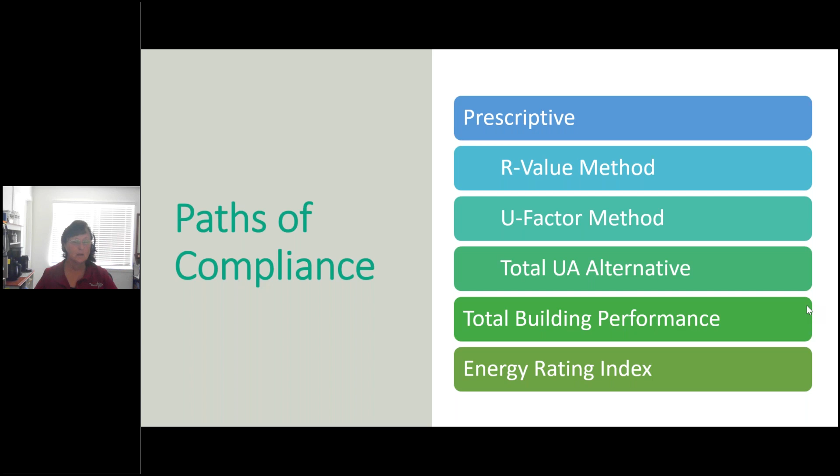So we're going to talk more in detail on those. What I want to give you right now is this high level. Here's what's coming in the 2021 that you really need to pay attention to. This is for residential, and it affects every climate zone out there. We'll look at some more of these in more detail like this. There's now options in that R value table. There are options for a cavity only option, a continuous only option, and a cavity plus continuous.

I don't see people doing some of those because the numbers get pretty high, but they are options, trying to stick with that intent that we have to provide flexibility and options. That's what this table now does. If you are used to the options maybe in climate zone 5, that I can remember right off the top of my head, R20 or 13 plus 5. Well, that's an R20 cavity or a 13 plus 5 for cavity plus continuous, and now you also have a continuous only option. So if you wanted to only do continuous insulation, which hasn't ever been in there.

So the U factors and the solar heat gain coefficients, I'll tell you, did go up a little bit in some of the climate zones. Now, if you're tuning in from Nevada today, Nevada has a few different climate zones. And so some of them did go up. And if you're in northern Nevada, you definitely want to pay attention to that U factor table, because there's a new footnote in there that once you get over 4,000 feet in elevation, your U factor drops.

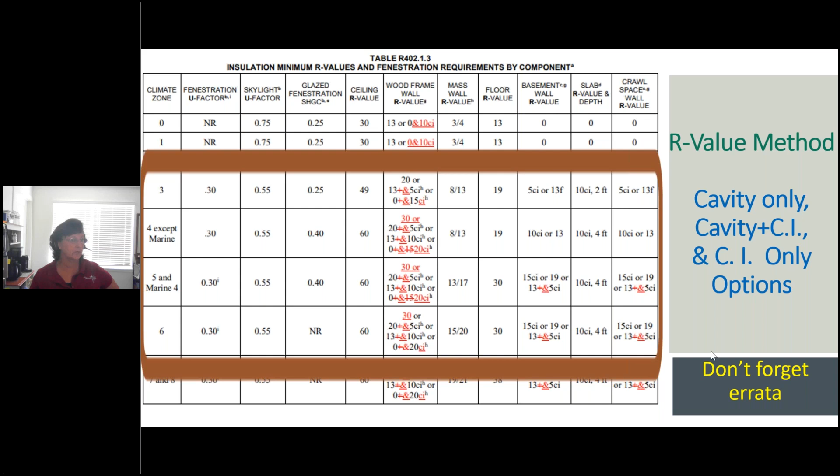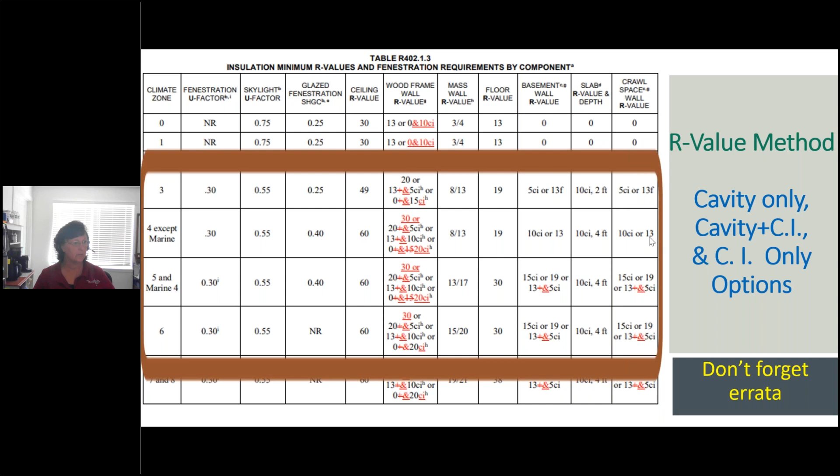But you'll notice some changes in here: the ceiling R values went up in almost every climate zone. The wall R values went up, so there are some changes to be had for sure. Then there's the U factor table, which is the U factor of every layer of the assembly. These two tables you can use simultaneously. So if I say, I'm okay doing all of this, I just don't like any of these options, I can do everything in this table and then go to this other table for the wood frame wall. So a 0.045 or a 0.060 or a 0.04. I just have to meet this U factor.

That means I have to add up all the layers of the assembly and still stay under this U factor. So you could do that and you might be able to comply. You could do that with every component and just calculate your own U factors and make sure you stay under them. It's allowed. It is a pathway. I just never see anybody use it because if you're going to do all these assemblies, you could just go over to the total UA path and use REScheck or one of the performance softwares that does a UA calculation, and it'll do it for you. But if you just wanted to do one or two of those, you could interchange the two tables. How do you find the U factor for material? ASHRAE Handbook of Fundamentals has it.

What I use is ASHRAE 90.1, because I have ASHRAE 90.1 that I use when I'm reviewing for commercial buildings. And in it, in Appendix A, there is a table for every different kind of assembly with insulation or without, and it gives the total assembly U-factor, so I can do that.

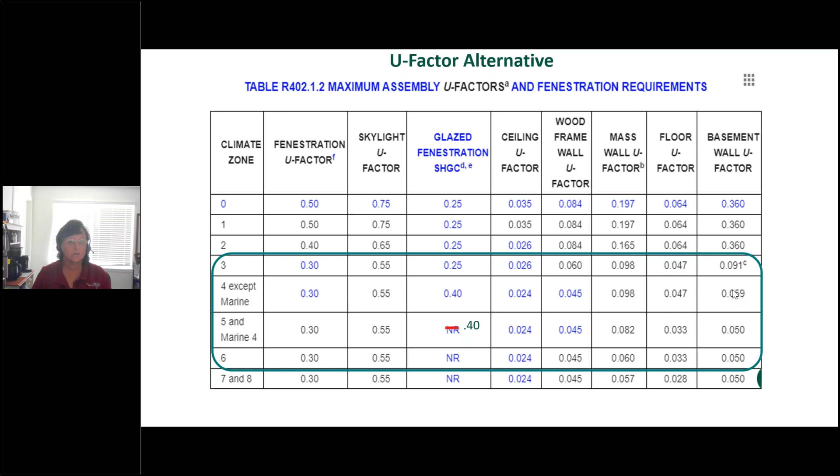Or sometimes, if I just have one thing I want to look up, I will go into REScheck and just put an assembly in there and get the U-factor for it without building the whole building in REScheck. So there's a few different ways to figure the U-factor, but if you're going to do it for the whole building, you might as well go over to this total UA path and use it.

What this is doing is like a twin house concept. You have two houses side by side, and you're trying to decide what the overall U-factor is. One house in the software, like REScheck or other softwares, is built to that prescriptive U-factor table. So based on how much window area and how much wall area you have, X amount of U-factor. It's a budget you have to stay under. So then you design it the way you want to, and as long as you stay equal to or under that budget, you're fine. You can build it that way.

And so it allows you to trade some things off, but only things that can be converted to a U-factor. So wood, insulation, glass, those kind of envelope items can be traded. You can't throw in a high efficient piece of equipment or a better duct leakage and trade that. You can only trade envelopes. So it is the first step towards a trade-off path, but it's only trading off the envelope.

I can put in a better insulation to get a worse window or vice versa, or I can put better insulation in my attic to get less insulation in my wall, or however you want to play with it to work it out. I call it my checkbook, the beginning of my checkbook.

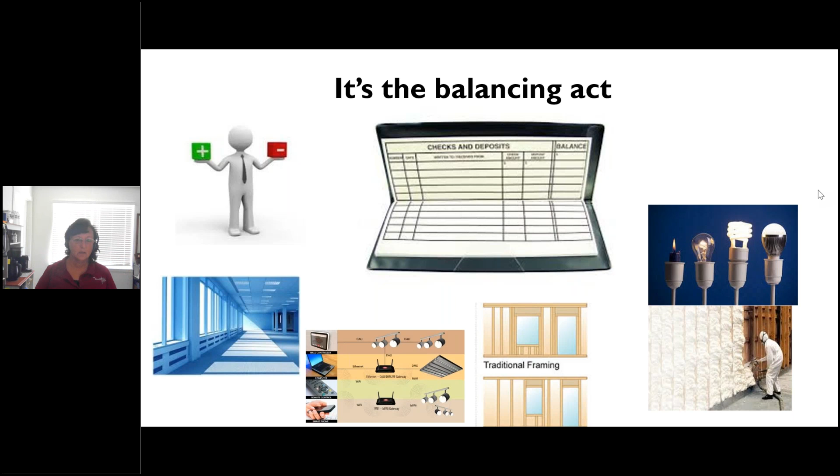And so the way this works is people think, okay, I have wood in my building and that's great structurally, I have to have this, and so if 1 king stud is really good, 2 king studs got to be better, right? And so what about this? Am I super great structurally with all of this wood in my building? Well, maybe. It might be a bit overkill, but what you definitely are is worse in the U-factor of your building. So what we're trying to get at is less wood.

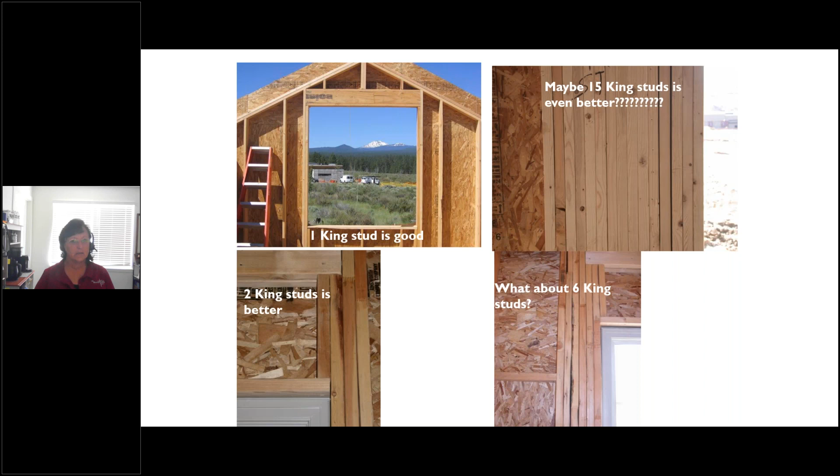And so if you see, wood has about R-1 per inch, whereas insulation is 3.5 to 7, depending on the type. So you could see without any continuous insulation, I can see all of the studs in this house. I can see that I'm going to get some thermal bridging. I'm going to get some loss there at all of those studs. So what this UA path and all of the other trade-off paths are trying to get us at is to cut down on some of that.

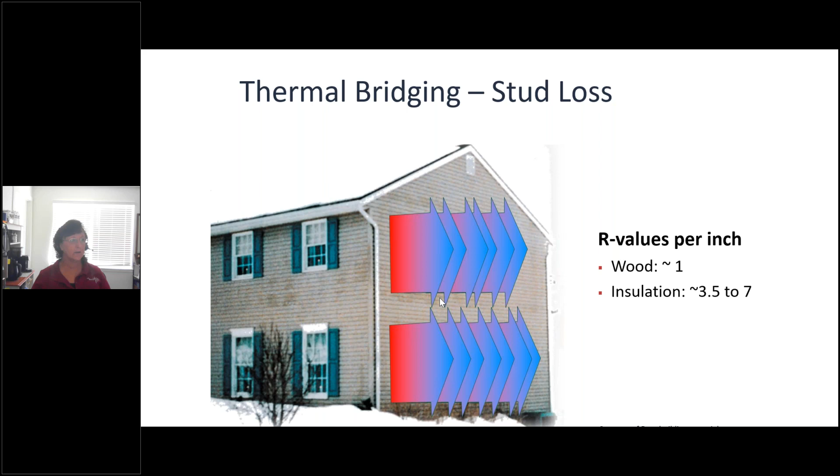And if I do, I can get out of something else, right? I'm not going to get out of it, but I can lessen the requirement. I probably will never find anything that I could totally do without. I won't be able to trade that far, but I could maybe put in less of a window if I put continuous insulation on this house or something.

So what we look at is if I have less wood, so maybe I'm doing some good framing, and I'm going to do 24 inches on center instead of 16 inches on center, then I have better framing. I have less wood, and wood is so expensive right now anyway, so there's one savings, right? I have less wood, so I have less thermal bridging, so there's energy savings, and then I have more insulation. Because I have more quantity of insulation, I probably could drop down on the R-value of the insulation and maybe be able to make that trade. So because I traded to less wood, I probably could trade down the R-value on my insulation.

So that's just kind of how this U factor and the performance paths work: what are you willing to do better than code? You might be able to do less than code somewhere else. It doesn't mean I'm not putting insulation. I just might be able to, instead of an R20, put in an R15, and still, because I'm using less wood, have just as good of a performing wall.

Or what if I'm willing to put in continuous insulation? So now I don't have any of that thermal bridging, right? I don't see any of those studs. If I put continuous insulation, that gives a huge credit in the code. And so now I can maybe put in lesser of a window, or I can maybe trade, well, in residential in the 2021, you can't trade slab edge insulation.

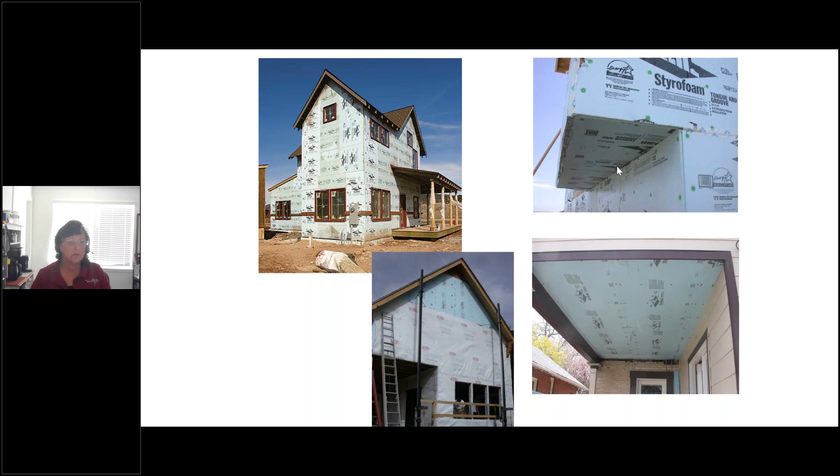This UA path, a lot of people are familiar with it. ResCheck is the simple software that we can use. Doesn't have to be ResCheck, that's just what people have associated with them. It's a free download at energycodes.gov. You just go in there and build your house, and tell it how you're going to do it.

Are you going to use a flat truss, or are you going to do a raised heel truss? A raised heel truss will give you a better credit, right? Because you're getting more insulation over the top of that wall. You're getting full height insulation. And so you would get a better U factor than with this flat ceiling or scissor truss. And then you have wood frame at 16 inches on center.

And then what if I did it at 24 inches on center? You could play around with it, but you can get more trades and maybe do worse somewhere. So that's ResCheck. There's a lot of things in there that are beneficial, but again, it's only the thermal envelope.

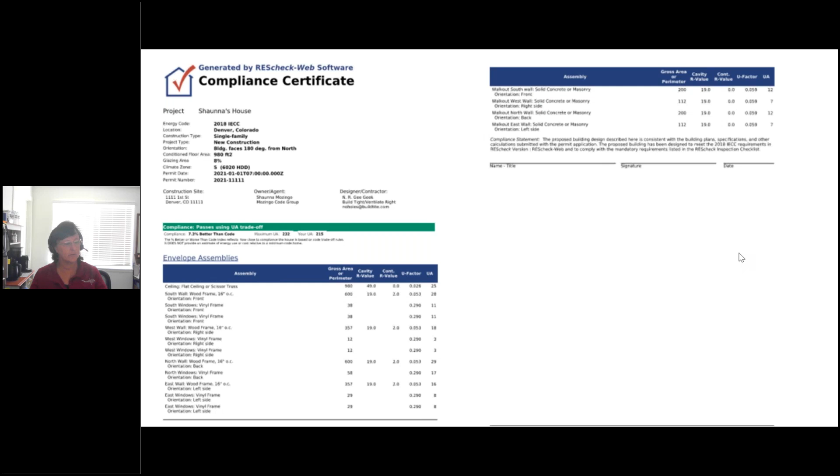If you want to trade more, I would challenge you to get an energy rater, a HERS rater, and go performance. This is where you're going to see the most of your trade and actually be able to see how well your building is performing. It's a computer software. Again, that twin house concept.

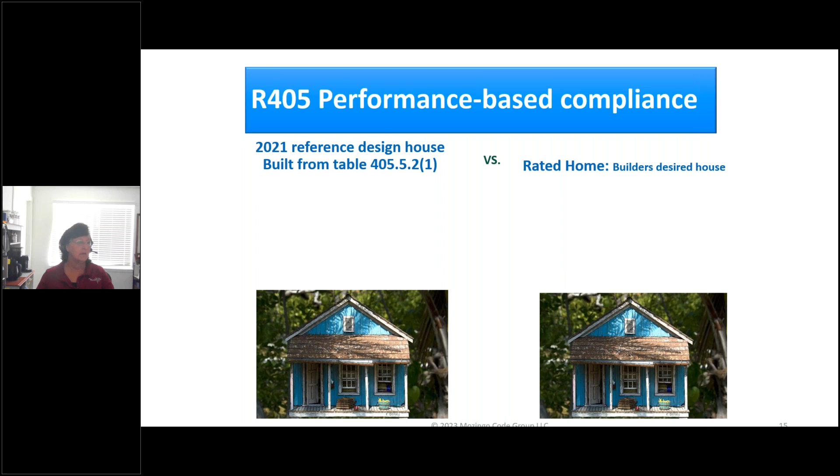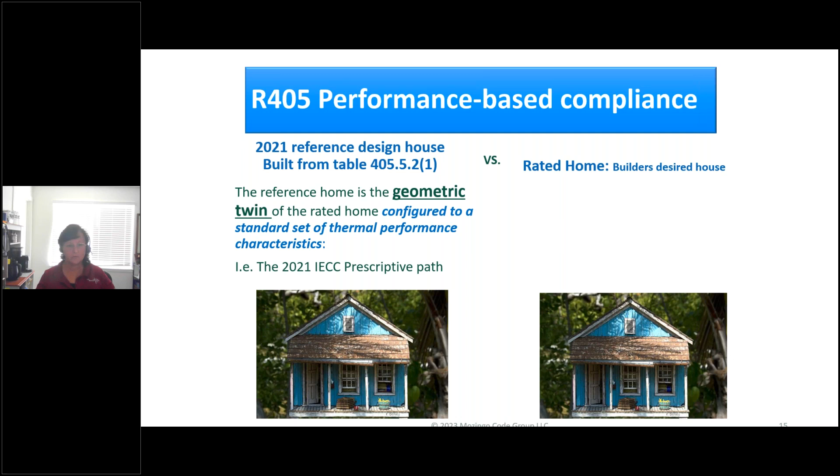It's got the houses that are designed with the same square footage and things, but one is configured to the 2021 prescriptive requirements, and the other one is whatever the designer or builder owner wants to build to, and you input them into the software, and it's based on cost of annual energy use. So as long as you could show that the house you're proposing to build costs less or equal to the house built prescriptively in annual energy use.

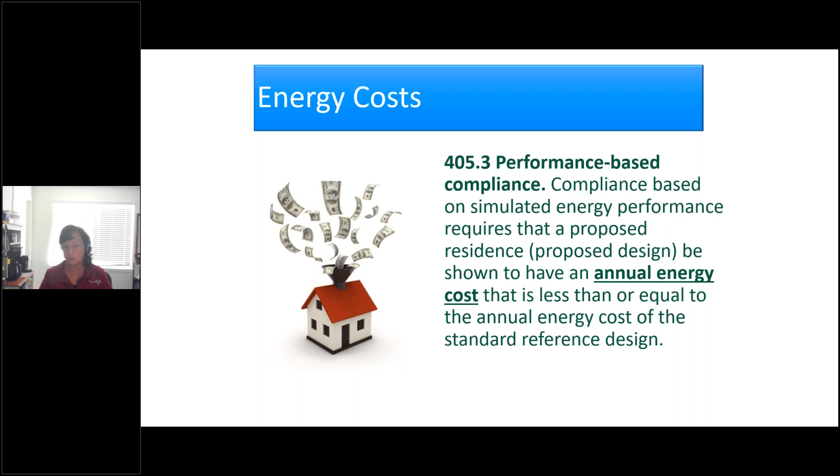So you input the local energy rates into the software, and as long as you can say over the course of a year, I'm going to be equal to or less than this house if it was built to code, you could do it the way you were proposing. So it offers a lot more trades. There's a couple softwares out there. Energy Gauge is used in Florida.

REM/Rate was the one for a very long time, but now Ekotrope seems to be pulling ahead as I do some research. But they both will look at the performance, they both will look at ERI, and they both will look at total UA. So you could use that software for all of those pathways. And you could see that the reports are similar. It's looking at heating, cooling, and water heating costs.

This is an old report, but you can see it evaluates many different code editions. And here's the cost if I built it prescriptively. The house that I'm proposing is only 945 instead of 1,008. I'm doing better, so then I can build it the way that I'm proposing. And that's from plans to proposed design, and then you go through and enter what you actually did in the field. It tells you how much better than code, and what edition you're doing it to.

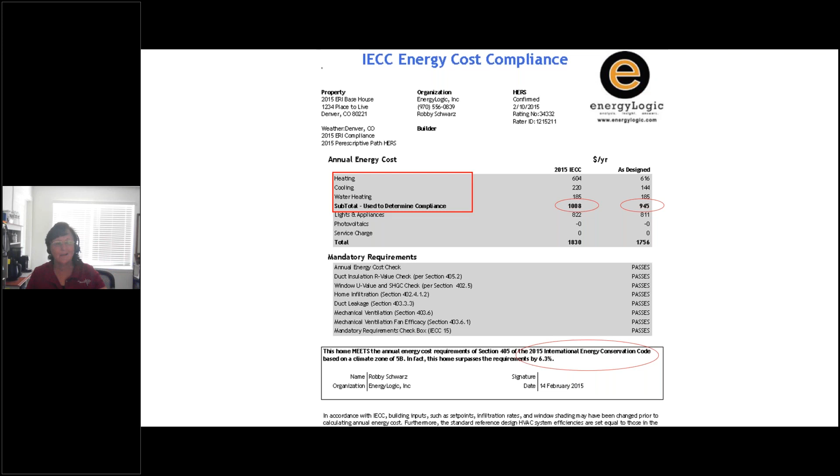So when I teach the actual paths of compliance as just one class, I will go through and explain it more, but we have got a lot to get through. So that's one path. And then the ERI path. The ERI path is the Energy Rating Index.

It's using a score for compliance. Same software, same people, same raters, everything. It's just instead of using that cost metric, or that cost metric also has an option for a BTU metric, this is using a score. A score of 0 would be a net zero energy use home. A score of 100 is the 2006 Energy Code, basically the 2004 supplement, but 2006 energy. So if I had a score of 85, I'm 15% better than the 2006, right? So I have to go through there and figure out what my score is.

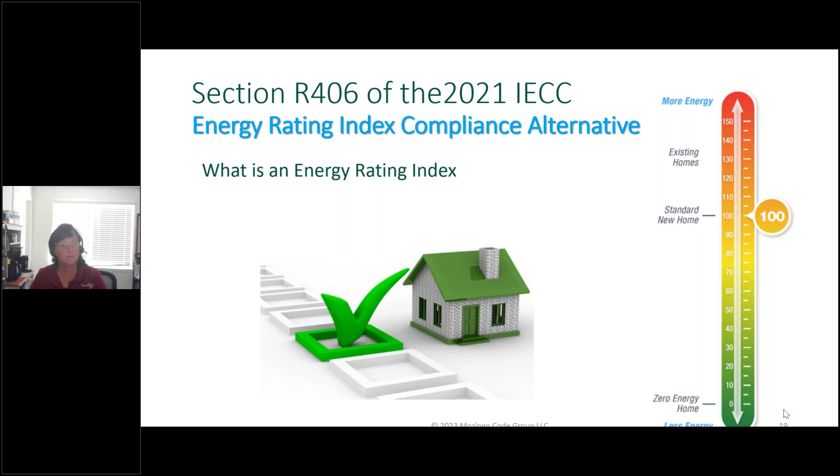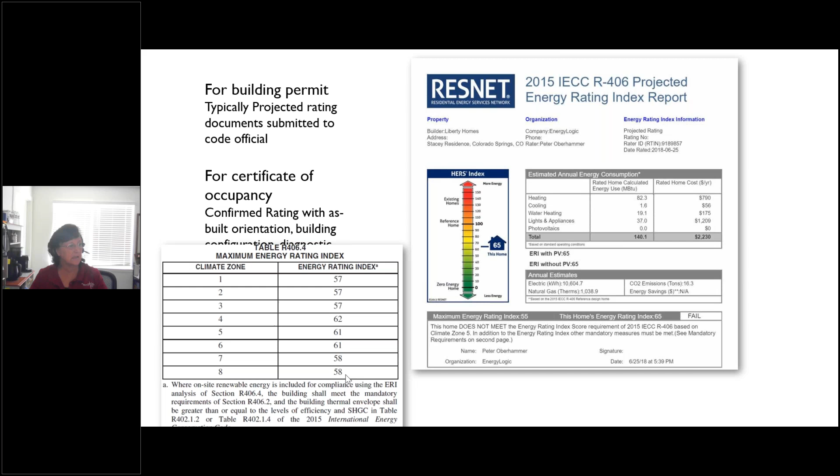You look at a lot of the same things. There's more trades built into this. You look at a lot of the same things, but over the years, it came in and it gave you a set of scores you had to meet. The 2021 has lowered those. So, if I'm in climate zone 5, I have to get a score of 55. If I'm in climate zone 3, a 52. I think we're at 6, maybe in parts of Reno or up there, 54. I have to get a certain score or better. So the lower the score, the better. Of course, we're trying to get to 0.

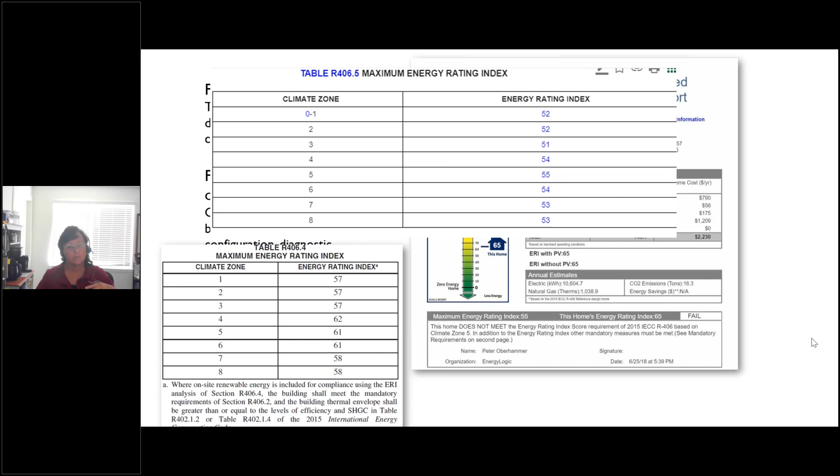I have to get a certain score, and it tells me what score I have to get, but it allows much more trade than any other path. And it does allow you to use solar and some other things to lower the score. So it allows you to say, maybe I'm going to put in a high efficiency furnace that will lower my score. That's my deposit into that checking account. Or high efficacy lighting is now required at 100%, so that trade might not mean as much. I could put all my ducts inside the envelope. That gives a really nice trade.

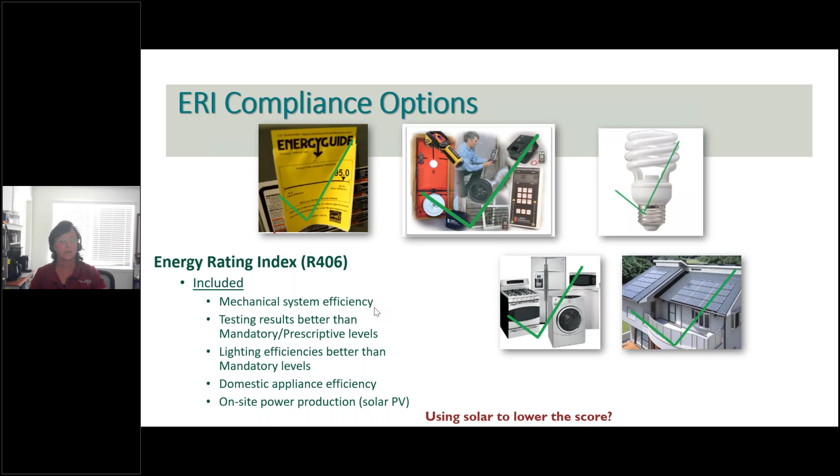And actually this one will give you a credit for a high efficient dishwasher and washing machine and those kinds of things. So there are different things that I can do to lower my score so that I could trade off somewhere else. It does allow you to use solar to lower your score, but it sets a limit at about 5% of that end energy use being allowed to be offset by solar. Each edition kind of changes that metric, but it's buried in a paragraph somewhere in the code that gives you that 5% limit. It does require you to build a good envelope if you're going to use solar, because solar can go away and we don't want to be stuck without a good envelope. But there's a lot of trade built in there, so that's how that path works.

The 2021 additional efficiency package options is interesting to find how you get there. In R401, it tells you that you have to comply with 401.2.5 and one of those paths. So it says if you go prescriptive, you have to go to 408.2 and pick one of the options to do on top of everything else that the prescriptive path tells you. If you go performance, you either pick one of these options or you do 5% better than the standard reference design, right? And if you're going to use a score, we saw that table, that score that you have to get, you've got to do 5% better than that if you choose ERI.

But if you have to choose one of these, the options are to do a 5% better thermal envelope total UA, so get a REScheck that passes by at least 5%. More efficient heating and cooling equipment, more efficient water heating equipment, a great duct system, and put all your ducts inside the thermal envelope, and it goes into some specifics on what that might be in the inclusion of ERVs or HRVs. Or build a tight house and do an ERV or an HRV. And so you have to choose one of those options if you go prescriptive. If you go performance, you either choose one of these or do 5% better than the standard reference design. And then ERI, do 5% better than the score that's required.

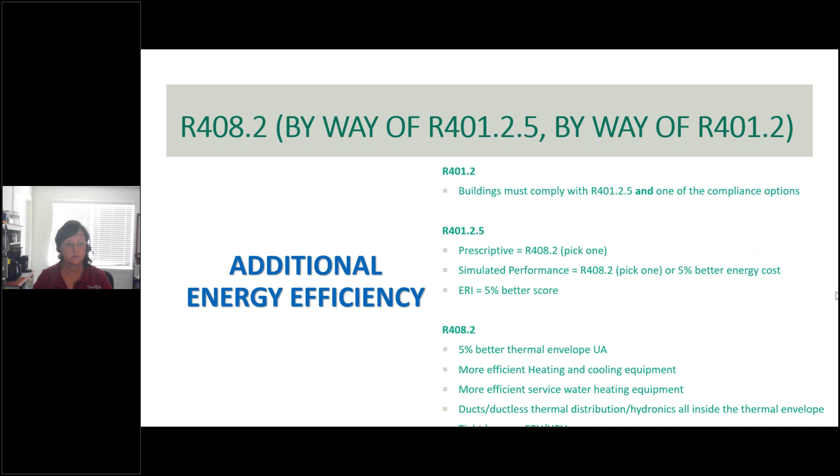So that's a new requirement in the code. If you're used to it in commercial, you only had to do it if you went prescriptive. But in residential, it doesn't matter which path you do. You're going to have to do whatever the code tells you to for that path, plus go at least 5% better than that. So that's flexibility built in, believe it or not. Instead of cranking the code down everywhere by 5%, they're giving you your choice of how to get that extra 5%. That's how that works. And then the other significant change was the inclusion of those additional efficiency package options. I mean, the inclusion of the appendices.

So you have a Board of Appeals. That's a new appendix in all the codes in 2021. There were a lot of jurisdictions who didn't have a Board of Appeals, and they didn't even know how to start that. So he created this appendix. If you're a jurisdiction that doesn't already have policies and procedures for how a Board of Appeals would work, you could adopt this, and now you have it.

If you want solar ready provisions, you can adopt Appendix RB, and if you want zero energy residential energy provisions, you could adopt RC. None of these are required unless a jurisdiction or a state specifically adopts them, then you would have to do them. So those are the big significant changes in 2021.

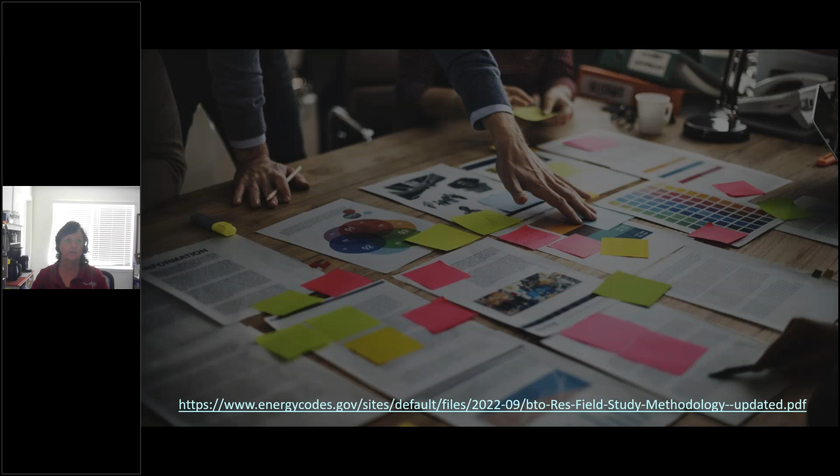I'm going to jump right quick now into our findings in the study. Les Lazarick helped with this study in Nevada. So Les and I did Nevada, and then Robby Schwarz of BuildTank Inc. and I did Colorado. So Les and I did Nevada. We went and did this study and looked at the houses.

I will tell you, the Department of Energy has created a methodology so that everybody's doing it the same way, so that when we all turn in our results, they can analyze them and compare apples to apples. You can find that methodology at energycodes.gov. That's the same website where you download REScheck and COMcheck. You can go there and find the methodology for residential field studies. You can also Google residential field studies and you'll find it there.

So what do we do to gather the data? That methodology tells us we can never go into a house more than one time. Well, you know that we can't see everything in one time, right? So we had to split it up. We had to see 63 of every measure. So in order to do that, we had to go to at least double that amount of houses. We had to do a certain amount of roughs and a certain amount of finals. So we did 63 roughs and 63 finals so that we could get 63 houses. So we did 126 houses to get 63 houses. So we couldn't ever go into one more than once.

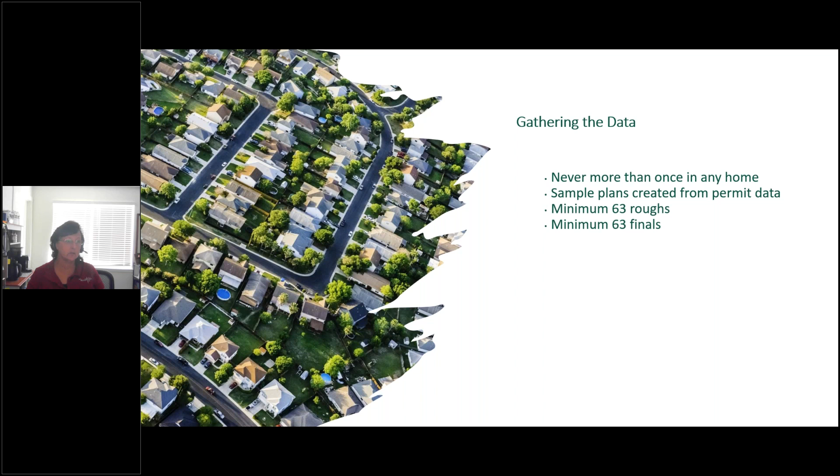The study is anonymous, so you will not know what builder we looked at or what house we looked at. Les and I know that, right? But nobody else knows that. The state doesn't know that. When we turn in the results, we scrub all of the information. The Department of Energy doesn't know any of that information, only Les and I. And so we scrub all the information. We want to keep it anonymous.

That way you get statewide results, and no code official, no contractor, nobody can gain bias or say, oh, this contractor did bad, this one did great, or this is what this inspector looks at and this one doesn't. We just want to go in there and gather data to get a baseline of where we are at, so that we can provide training and resources and then go look again in the future and say, oh, look, this has made a difference, or hey, we still need to do things here, or maybe we need to change the code because nobody's understanding it.

Like, we're just trying to gather data, and if we start making it look like we're judging you or you guys can judge each other based on our results, nobody will ever let us in their buildings again, and we just never want that. So it's completely anonymous. Nobody knows what's going on. And the only reason that I collect the information is so that I know that I didn't go to the same builder more than once in a subdivision, and that I dispersed things out, that we didn't look at all of the construction in one place in a town.

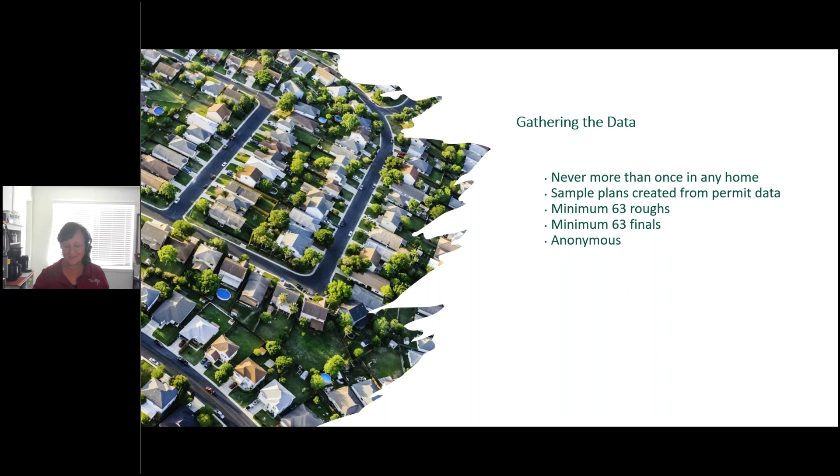So we did have a mix of production and custom builders. Like I said, a mix of locations around the entire state, around each city or jurisdiction that we picked. DOE has a random sampler that they create. They take all of the jurisdiction construction data and they put it through a random sampler, and it spits out that sample plan that tells us how many buildings we have to get in each city and which cities we go to. So a lot of it is anonymous.

We prioritize what we look at by DOE's top 8 items, like air leakage, duct leakage, insulation, those kind of things. We did look at a lot more than that, but those were our priorities to make sure that we might only have 10 or 15 of this measure here and this measure, but we have 63 of their top 8. And so that's how that's done.

And we looked at different things like what paths of compliance did people use, what code edition did they look at. Even though you have a state code, different jurisdictions are allowing different editions, we're finding. And we looked at what kind of equipment was installed. So we'll show you some of those findings.

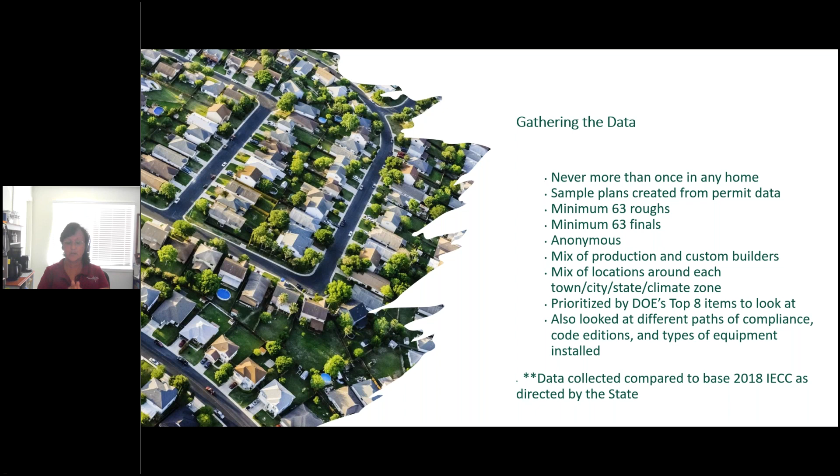One thing I will say though, even though you have Nevada amendments, we looked at everything compared to the 2018 IECC. What Nevada had decided to do, and Colorado did the same thing, was to look at the 2018 so that we could see how close are we already to the 18. So if we try to move to the 2021, we know how big of a step we have to take going to that 2021, because here we are compared to the 18, not compared to all of our amendments. So just keep that in mind.

There is an amazing website that you can go to find all of this data on every residential study that's been done out there that uses DOE's methodology and uses PNNL to look at the results. So it's fun to go. We don't have time right now. In our future trainings that we are going to do in Nevada about our findings, we'll tell you what we found. We'll go to this, show you how to analyze the data.

It gives you, here's where you rated according to the 18. If you did this, you would save $1 million over the course of a year, or you would save 500,000 over the course of the year. It gives you great information in there and how you compare to other states and stuff. So I would encourage you to go play around with that.

We will show that in our regular trainings that will be between 2 and 4 hours. Some will be in person and some will be virtual. But for now, I don't have time to go through that with you. I'll give you a summary of what we found.

So when we looked in Nevada, this is Northern Nevada and Southern Nevada together, we ended up looking at over 128 houses or 129 houses. Out of all of them, one showed compliance with the 09 code, even though the 18 was adopted. 7 showed compliance with the 12.

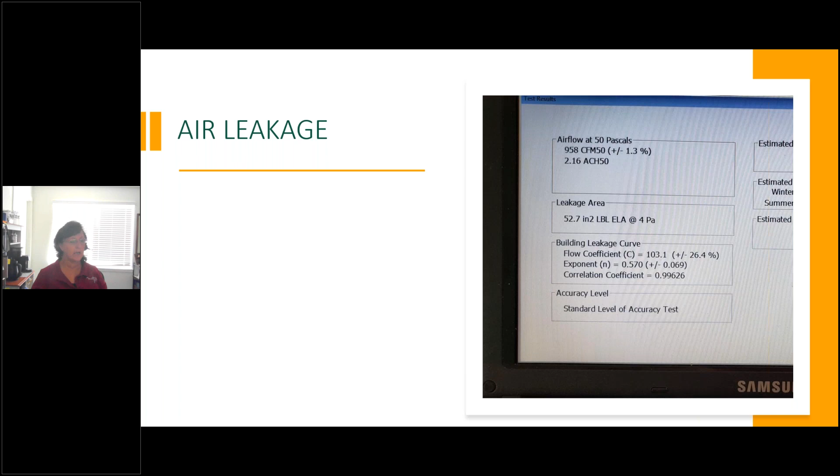So here's what DOE asks us to look at: air leakage, right? So we looked at all of those homes, the leakage testing results. The average was 3.7. So you could see there were some good houses all the way down to 1.5, but there were some outliers all the way up to 7. So that just tells me if our average is 3.7 and the code requirement is 3, if I go prescriptive, I have some areas of training that I need to do on how to seal up that thermal envelope.

And so that's great. That tells us where to go, how far we have to go. A couple little more things and you're there and you'll never have to worry about it for Nevada. So that makes me feel good.

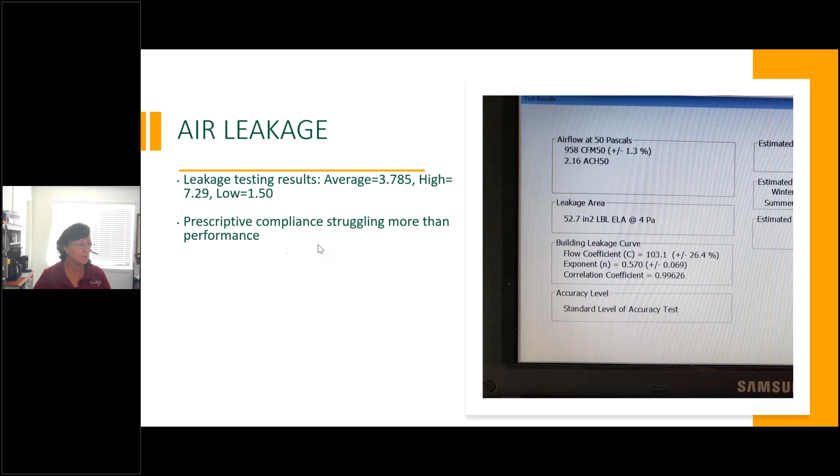Some things I found: prescriptive compliance struggled more than performance, because maybe when you go performance and you utilize those energy raters, they are doing a lot more on-site, maybe looking at that air barrier when it's going up, or looking at that insulation when it's going up, or looking at things a little more closely because they might be able to be there a little bit more, or have more one-on-one conversations with the builders and interact with them a little bit more, then they can make sure that we are in better compliance.

Production builders are more used to testing. Now, Nevada has some amendments in certain places out of the testing requirements, or a higher testing allowance. And so we did find that production builders that have to build everywhere, they're so used to testing in other places because it's required, that they were more used to testing than custom builders were. And those localized amendments bring the numbers up.

So when you see some of these averages, remember there are places that don't require blower door testing because of amendments. And so we might have tested and they got up to 7, but they weren't required anyway. So it just raised your average. It doesn't mean you weren't meeting code because your code is amended. We're comparing to the 18 and it's just saying, here's where you are. If you want to go to blower door testing in the 2021 or go to blower door testing as a requirement at all, here's where you're at. And so we just have to pay attention to some of those details.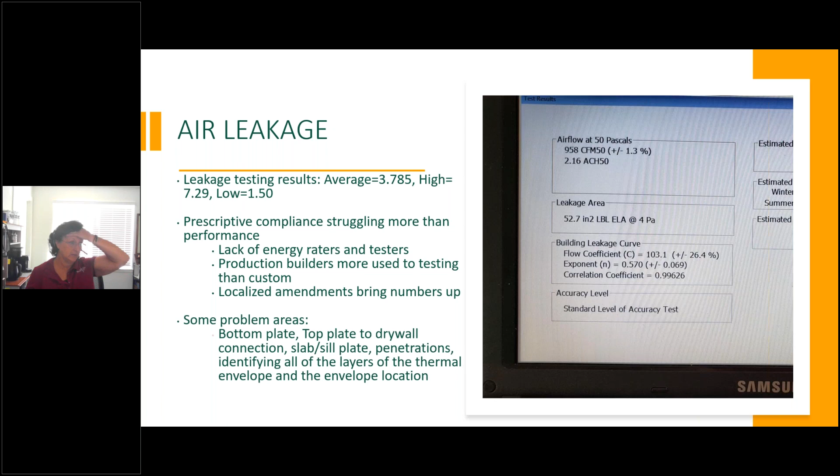But we found the problem areas: the bottom plates, the top plates, the drywall connections, just basically our thermal envelope connections and penetrations. So we're going to look at that in detail. Looking at that thermal envelope, it has to be defined, so that we know, is that attic inside the envelope, is a crawl space inside the envelope or outside? Where is your envelope? And let's get every detail of that sealed up tight, right? So that we save energy, we have a more durable and resilient building.

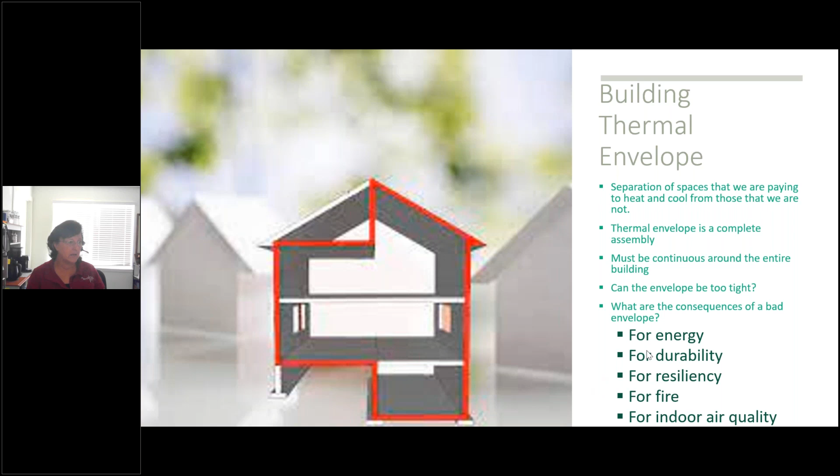And you know, we witnessed here in Colorado the less spread of smoke when houses were on fire and they had a tight envelope. Houses next door didn't get as much smoke damage. So there are all kinds of reasons that we do that. But air in is air out. If I have leaks out of the building, my house is always going to keep a neutral pressure, and so it will bring air in from somewhere, and it'll bring with it anything that's out there. And plus I have to reheat and recool that air.

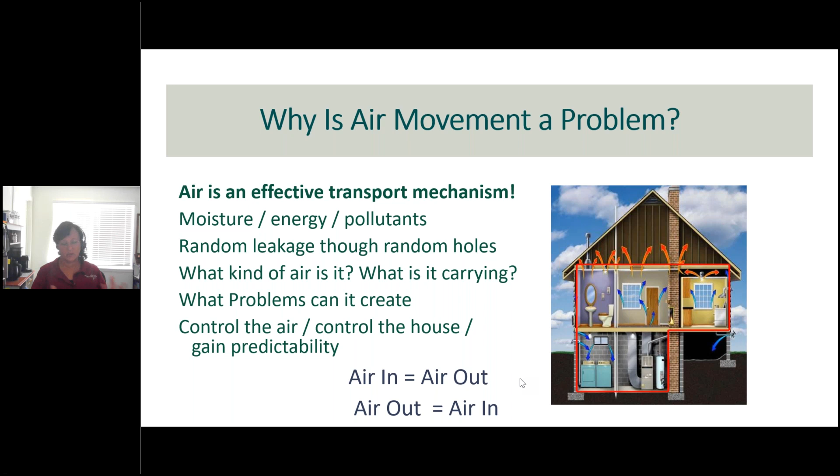So what I just want to get to real quick, because you guys just have a little bit to go on this air tightness to meet that, to where you wouldn't have to worry about, oh, who cares if the code changes, because we're there already, right?

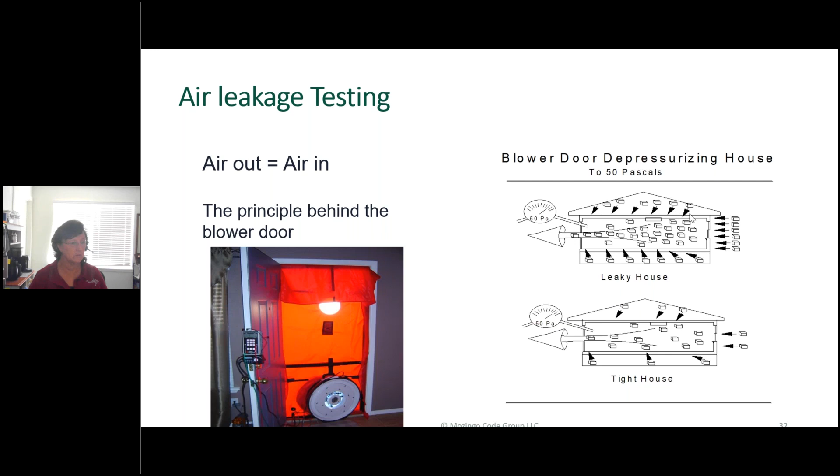And you almost are. We do those blower door tests to find the leaks. We're not saying don't have any leaks, we're just saying don't go from so many, let's get a little fewer, right? And so the requirement is 3 ACH in all of the Nevada climate zones. You can trade it off, but you can't go over 5 air changes per hour.

You can use that CFM per square foot of dwelling unit enclosure area now for attached housing and smaller houses. So that's great. And then the heated garages, there are some exemptions in there on testing for heated garages, as long as you look at the table and do some other things. So some things to be aware of in there. I can't go over them all today.

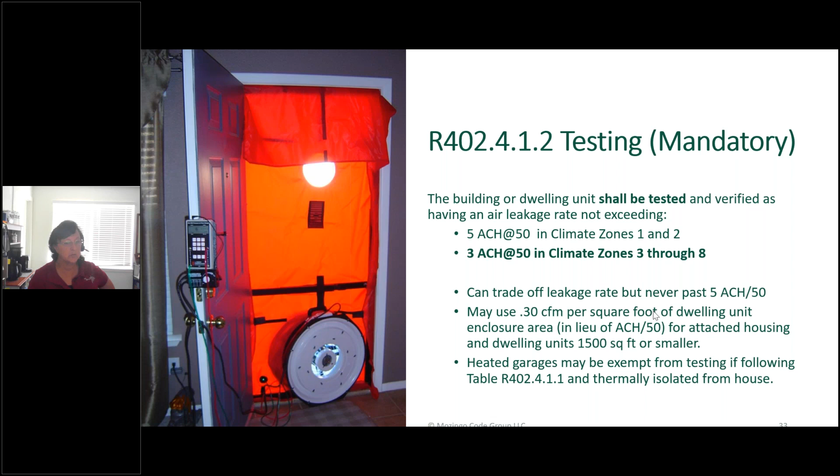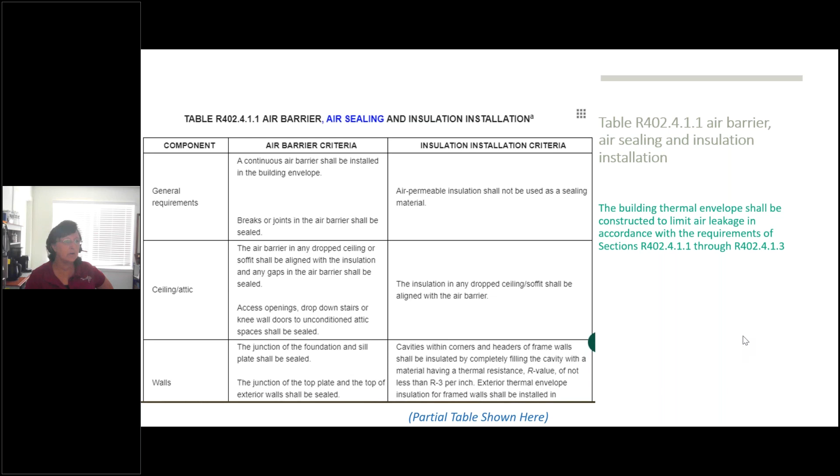What I really want to go over is this table. This is your roadmap to 3 air changes per hour, and you're so close. This table tells us how to do the air barrier and the insulation and each component and where to seal it and where to make sure you get insulation in there. If you do this, you're going to get to that 3 air changes per hour, no problem. And so you do that, and also it says do this plus manufacturer's install instructions.

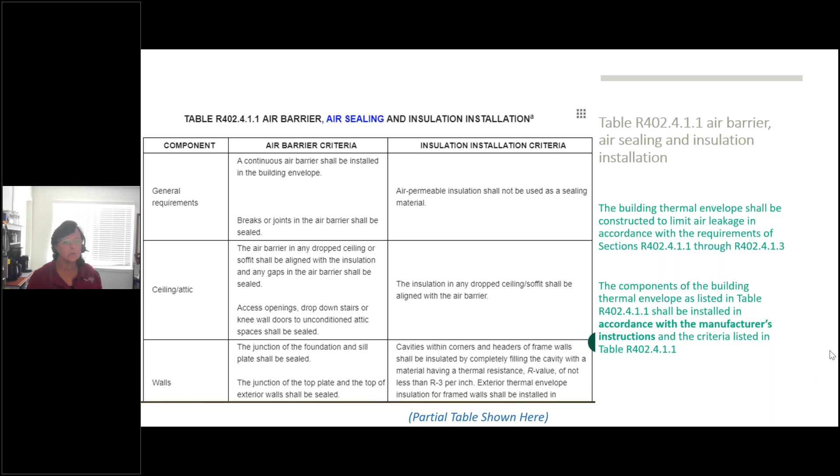If we tried to make a code with all those install instructions, we would have to carry it around with a wheelbarrow. I mean, the code would be too big. So it just breaks it up. Here's the places where you need to make sure you seal and some stuff that you need to know about insulation. So in general, I have to have a continuous air barrier around the entire envelope, and all the joints, the seams, the penetrations, everything has to be sealed.

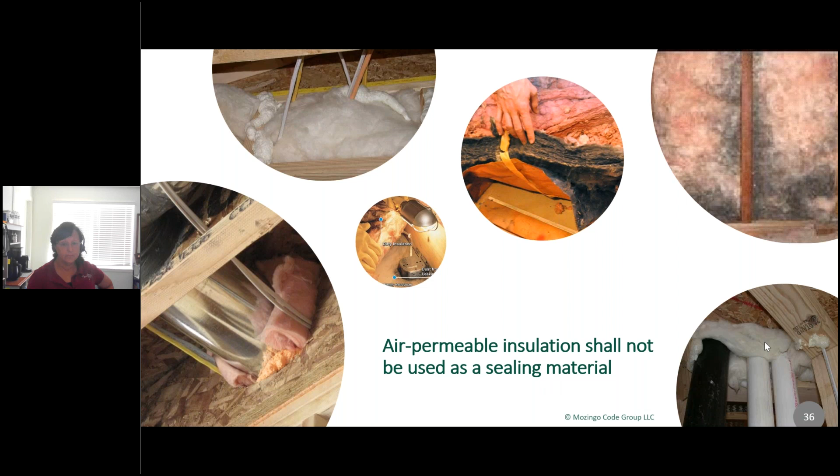Right? And so I cannot use air permeable insulation to seal things up, right? So I can maybe get away with it in the IRC for my draft stopping or fire blocking, but I cannot use it if I want to pass a blower door or to seal up something. It works as a great filter, but it does not work as a great sealant to block the transfer of air. It's permeable, right? Here's how this permeable insulation works.

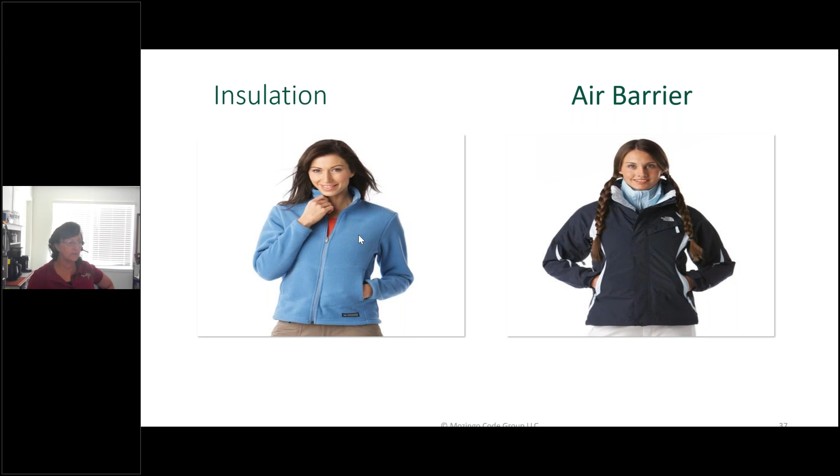This is what I wear in the middle of the winter in Colorado. I wear this fleece jacket. If I put this fleece jacket on, it traps those pockets of air next to me, and it creates R value, right? My body heat is staying in, and I can feel that until the wind blows. Once the wind blows, then I need my windbreaker on. If I put the windbreaker on over the top of my permeable insulation, then now I'm retaining the heat again.

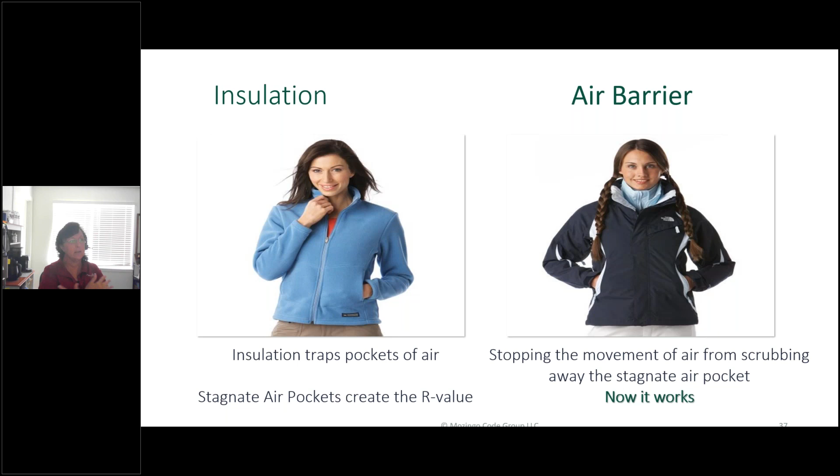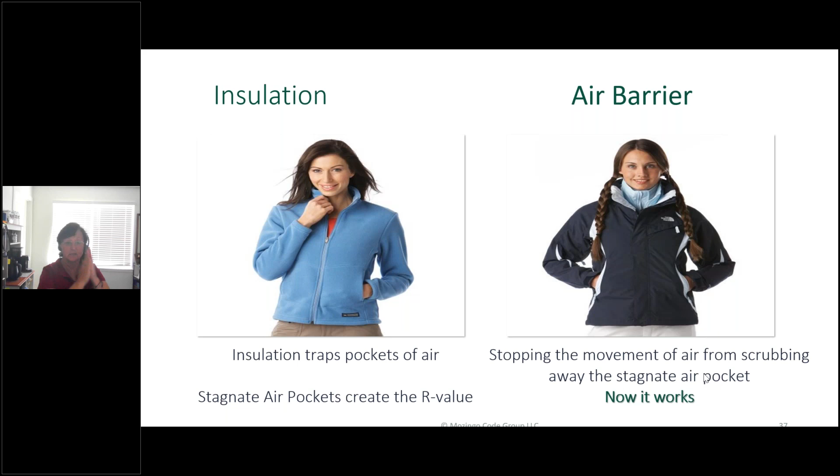It's trapping those pockets of air and keeping them in there, and now it works. This is how insulation works, right? I need my windbreaker over the top of my insulation. Without it, when the wind blows, I feel it and I get cooler, right? This is how insulation works. This is what we're trying to get in our thermal envelope assembly, is that alignment of the insulation and its air barrier so that the insulation has a chance to work.

So that's what it's telling us in the ceilings, it's telling us our air barrier. If I have a drop ceiling, it has to be aligned with the insulation. And then any access openings have to be sealed, and I need to also insulate them. So what this is saying is, I can't just have a cutout of the drywall. And if you looked at how air moves in the building, as it heats up, it rises, and it's trying to get out any of those openings. And so attic access is a big one.

If I turn on a blower door, I'm reversing that, and I'm sucking the air out. If I have a big opening at my attic, I'm going to suck all that volume of attic air in. I'll never pass my blower door. I have to get a tight attic. I can't just cut a piece of drywall and call it good. I need an air sealant, and I need insulation on that.

If I have a dropped ceiling, I can put insulation on a dropped ceiling, but I have to have an air barrier for it to count towards my thermal envelope. If there's no air barrier, then it's just there for sound. It doesn't get to count. And so I need an air barrier.

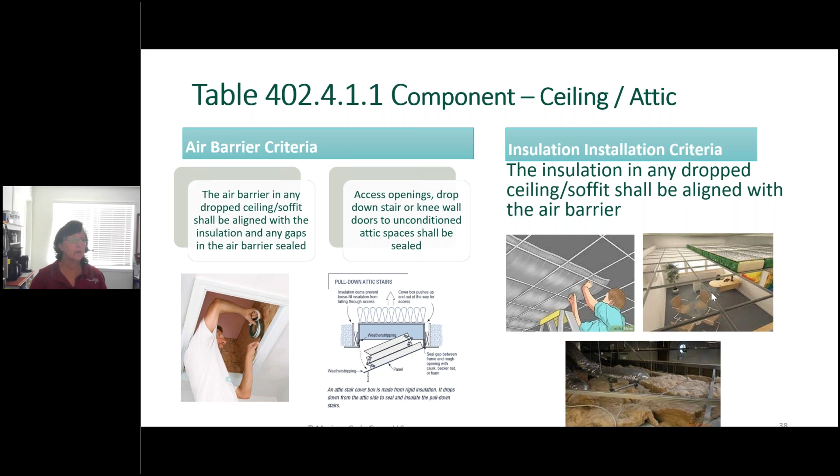I can't call the dropped ceiling my air barrier unless it's a drywall lid. I can't call it my air barrier because it's got a bunch of joints and seams. So I would have to put another air barrier on. I just have to pay attention to that when I'm doing dropped ceilings.

Walls: the top of the wall has to be sealed, the bottom of the wall has to be sealed, knee walls need to be sealed. You need to get at least an R3 into those cavities and corners and headers. And then this is where it's really specific to say that the insulation and the air barrier have to be in contact and in continuous alignment with each other in those walls.

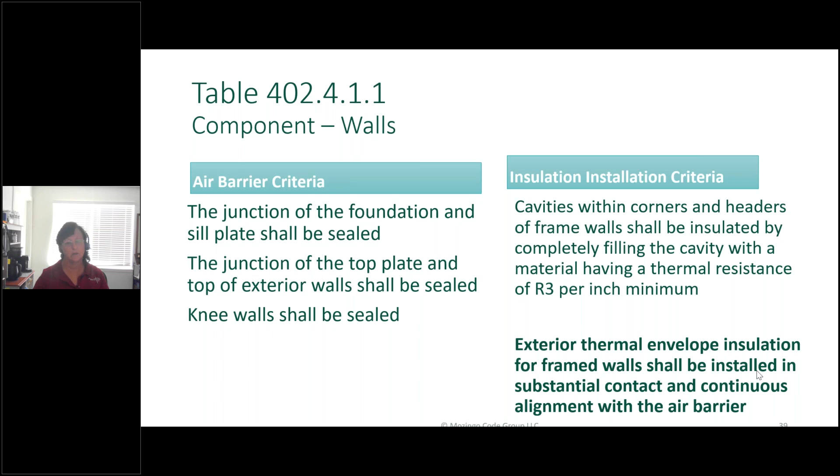So if I'm sealing the bottom of the wall, there's a lot of different ways to seal it. I have seen people do caulking. I've seen people use a sill seal. I don't know. To me, sill seal is a wicking to keep the moisture from the concrete going up into the wall. I don't know that I would count on it or rely on it as an air sealant. But I see people use all kinds of different things to seal the bottom of the wall.

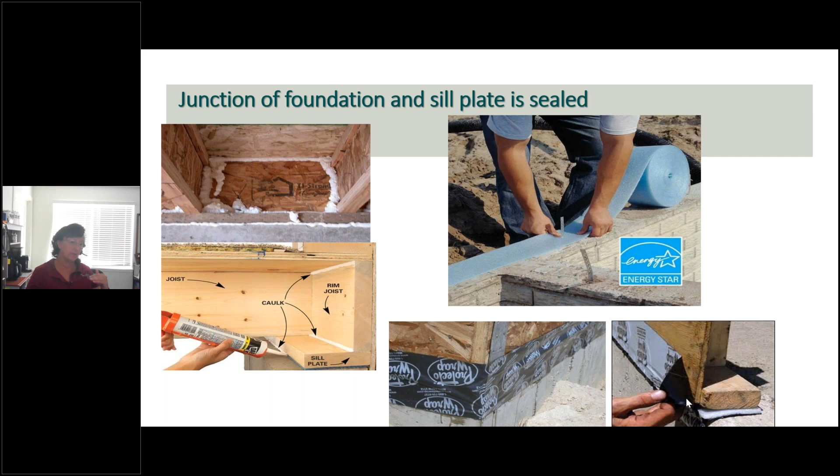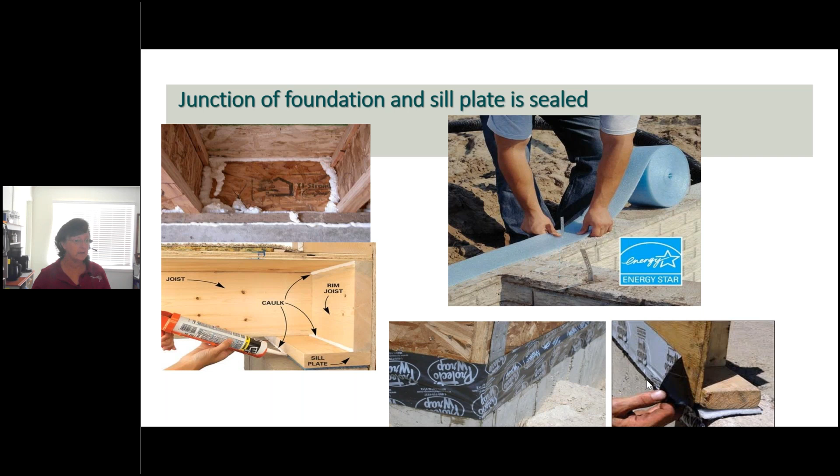Could I get away with nothing? Possibly. It depends on how you do everywhere else in your building, right? You are going to decide where in the building you're doing it. When you put your house together, you do a blower door, you find where the leaks are and which ones you can seal up most cost effectively and easily so that you pass your blower door. Again, we're not trying to say no leaks, we're trying to say very little leaks.

And so top of walls, this is one place that's pretty big that people forget about. There's no one way; the code doesn't say how to do it, it says to seal it, right? It doesn't say you have to use any particular product or any way of doing it, but the idea is that I seal all of the holes going up into the attic and at the top of the wall so that the attic air doesn't make it into my wall and into my house when I do a

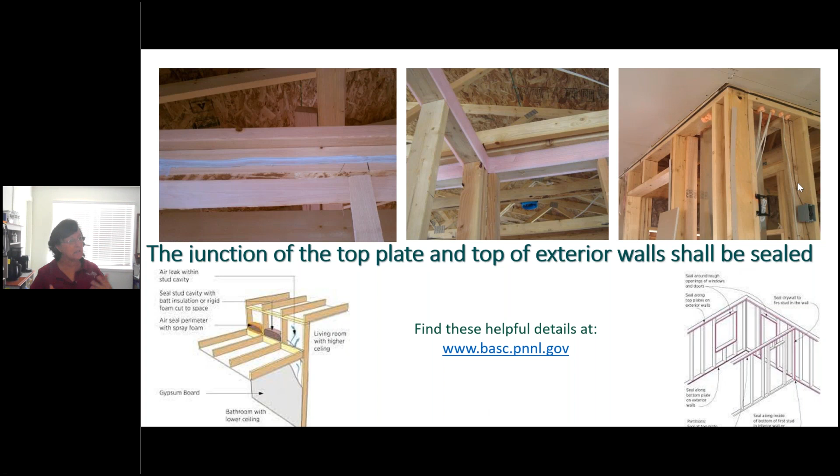blower door, or the air that I've already heated and cooled inside doesn't make it into the wall and escape into that attic, and now I have to reheat and recool air all the time. Or the moisture that's in this room doesn't make it into that wall and mess up the wall. There's a lot of reasons that we do air sealing. So those are some of the things.

Seal up those attic knee walls. Maybe if you put your air barrier where you're supposed to, the insulation would stay where it's supposed to. But there's a lot of times where you have conditioned space and unconditioned space, and that knee wall has to get an air barrier and insulation. It's your vertical envelope wall, right?

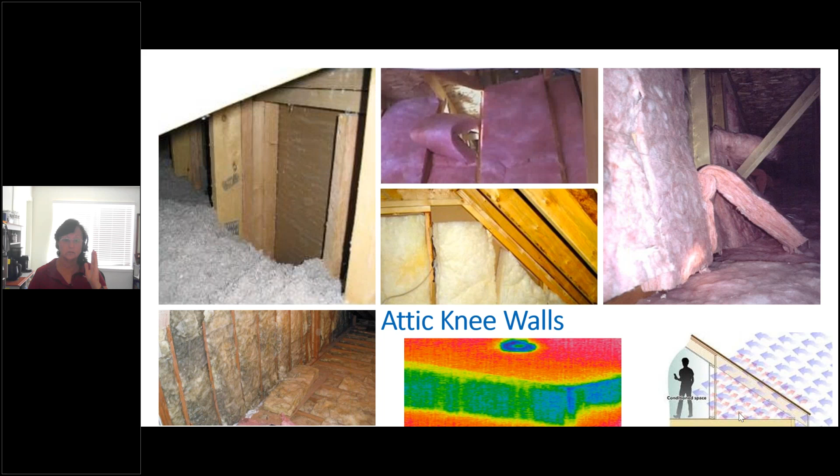And so making sure there's some way to get at least an R3 into those corners, redoing how we do those corners. The IRC made significant changes in the amount of headers that we need. It's reduced, which adds to why it's cheaper to build. Actually, in 2018, it made that change. So now we have room to get some insulation up in those headers, so making sure we get insulation in there.

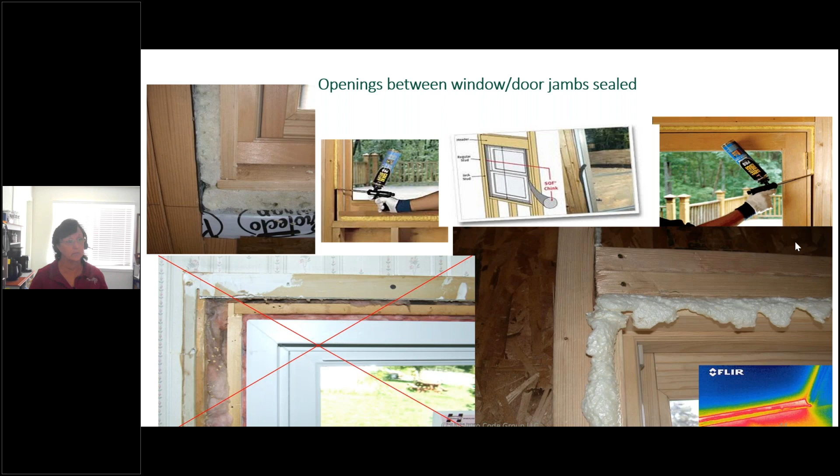Don't use permeable insulation to seal around doors and windows. It works as a great filter, but it will not stop the transfer of air. So use some caulking or some backer rod or something to seal up around those windows. Make sure you get the rim joists for insulation and air sealing. There's a lot of different ways to do it. I see people now just spray foam their rim joists because it's easier than cutting insulation.

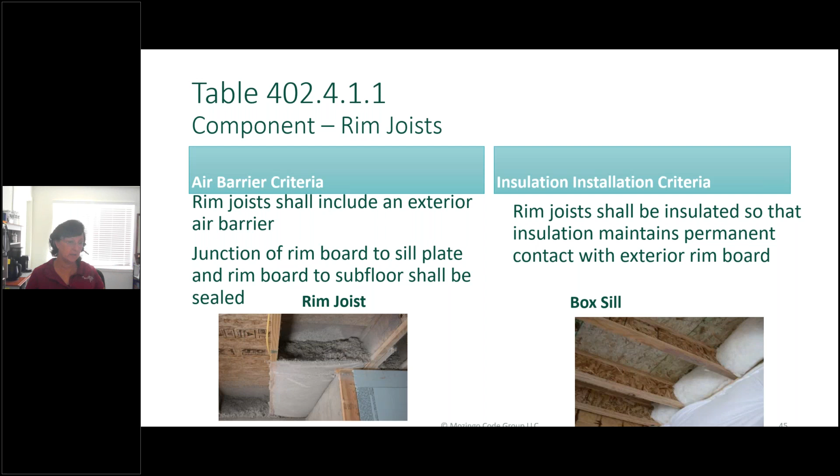Make sure the floors are getting insulated, and the ends of the floors. Especially if I have a garage on one side, I definitely want all of those ends sealed up. I either have to have my insulation in permanent contact with my subfloor, or with the new exceptions that are in the code, I can drop my insulation down, as long as I have some continuous insulation and drywall on the bottom and I seal up my cavities.

So again, I'm barreling through this. The classes that we're going to bring to you in Nevada will go into detail about how to do all of these things.

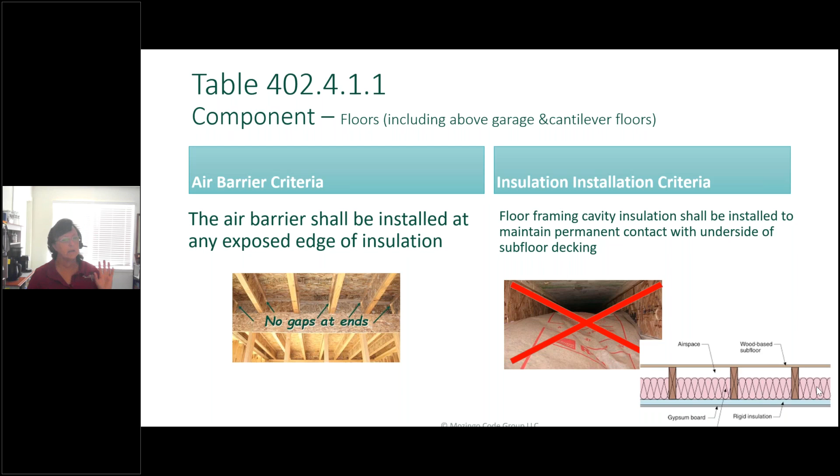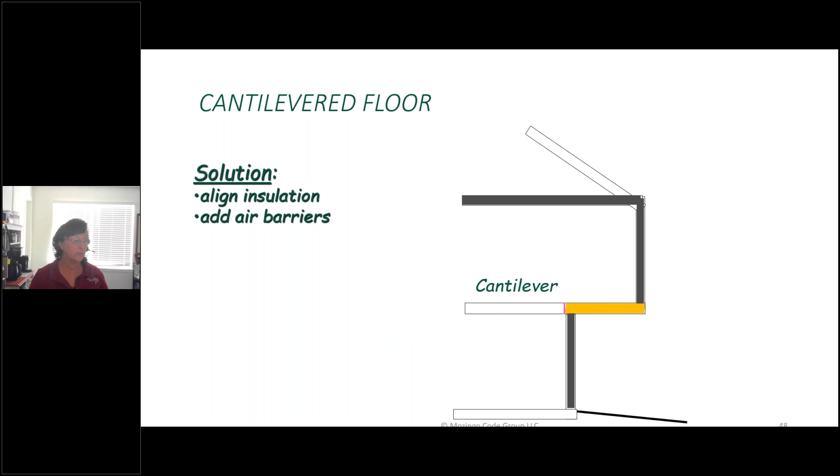I'm just telling you, these are the places that we've identified where people are not doing it correctly. So I'm highlighting that. Don't forget cantilevers are floors. There's a couple places that you can get air leakage in a floor and a cantilever. So making sure you get those tight, sealed up correctly. We're finding all kinds of ways that they don't get done correctly.

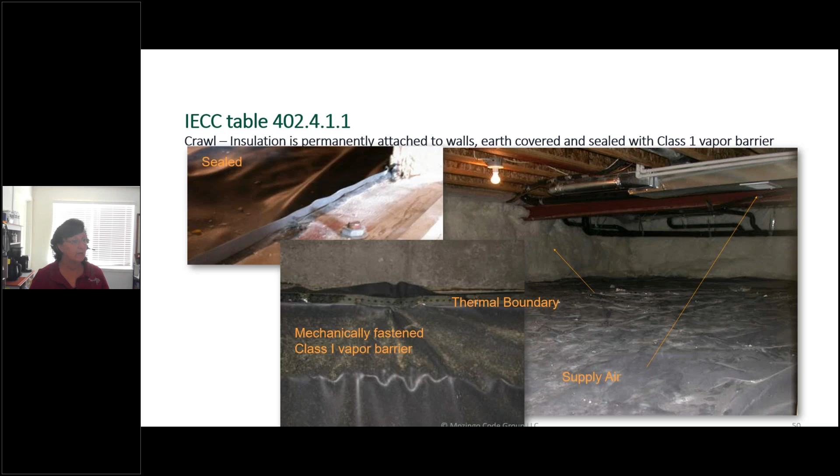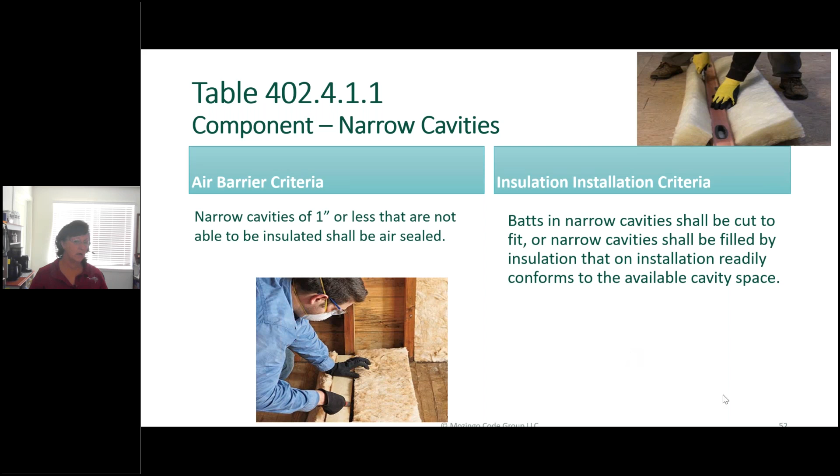And so getting those sealed up, and then your crawl spaces have to be done correctly with insulation and vapor barriers if they are conditioned crawls. So penetrations, those are things that we found. Your narrow cavities, either fill them with insulation or cut it to fit, don't shove them in there. And then making sure you get that real good separation between the house and the garage.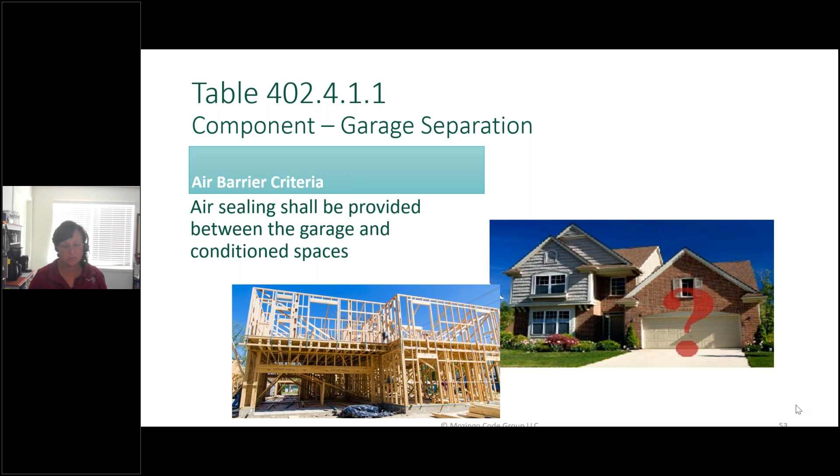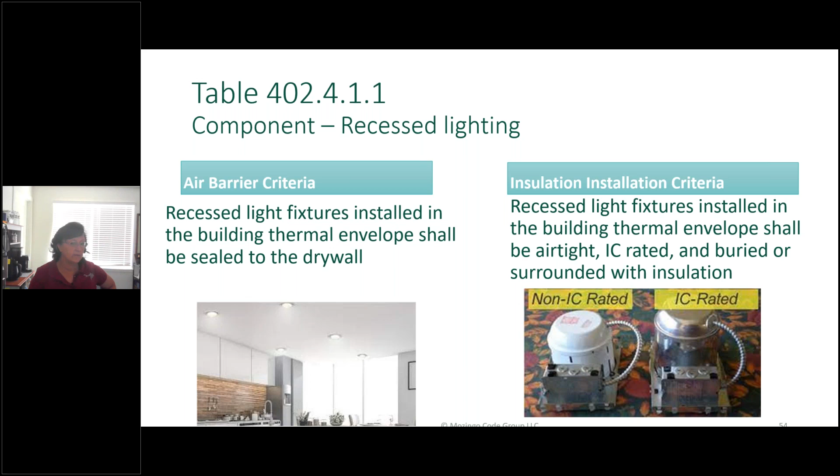Even if the garage is conditioned, the code says you have to put the thermal air sealing between the house and the garage. We do not want garage air in our house, right? We just don't want that. And so you have to air seal completely. Recessed can lights, that's another place, because the air is getting warm and it's going up and it's going to try to get out. And so you want to make sure that you have sealed can lights. It's another penetration in the envelope.

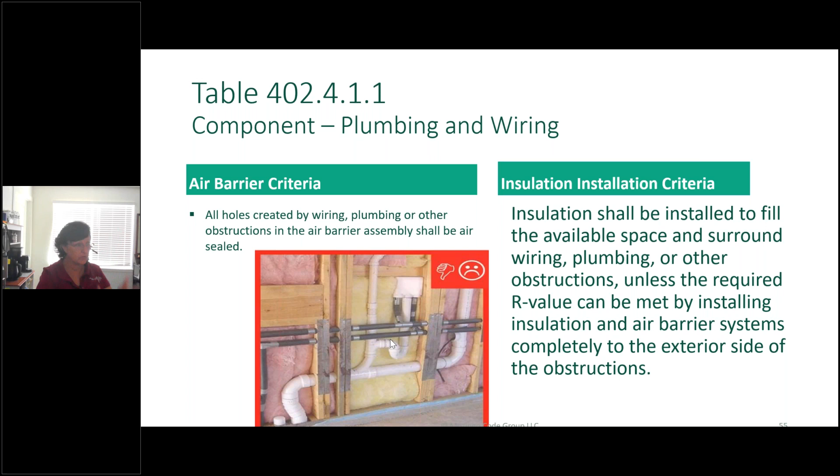This is in the table about making sure that you get your insulation. If you use permeable insulation, you have to split it around the plumbing, because again, remember it says your air barrier has to be in contact with your insulation. And unless you use like a ZIP System or something on the outside that can be considered an air barrier, your sheathing isn't an air barrier because you're not sealing all the joints and seams. So your air barrier is probably the drywall on the inside. How do you have your insulation in contact with its drywall? You have to split those batts and put them around both sides if you're using that kind of a situation.

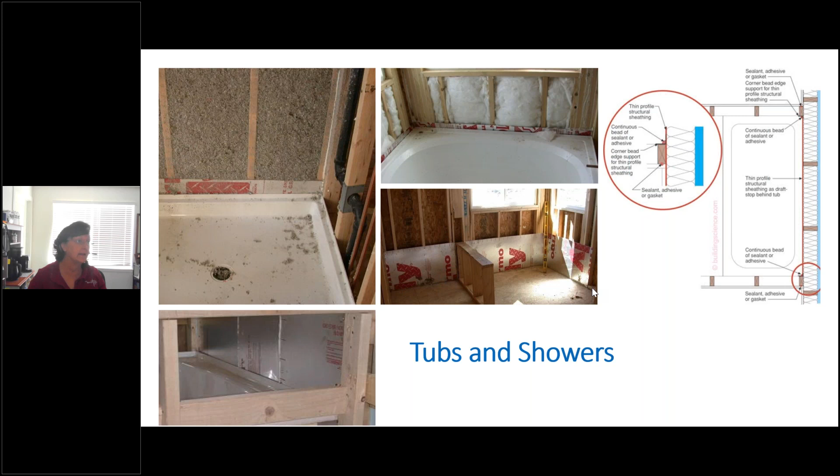Air barrier at tubs and showers, making sure that you're getting back there before the tub gets installed and get that air barrier in there. You can come in later and insulate behind it, but you got to get that air barrier in there. That's one place that I see missed a lot, or behind fireplaces.

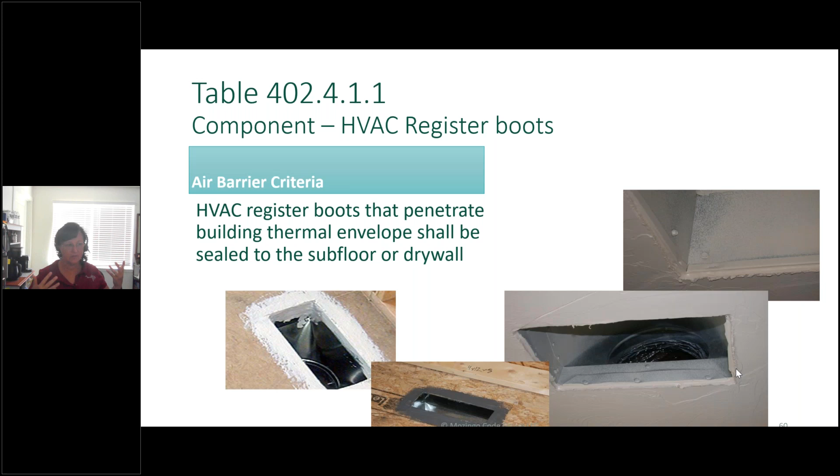This is another place that's kind of crazy to do, but think about it. If I have a register and I have a big floor cavity or a wall cavity or a ceiling cavity and I don't seal around those, when I turn on a blower door, I can pull the air from that cavity and it will add to my volume of air, and I'm not going to pass my blower door test. So making sure I get those sealed up.

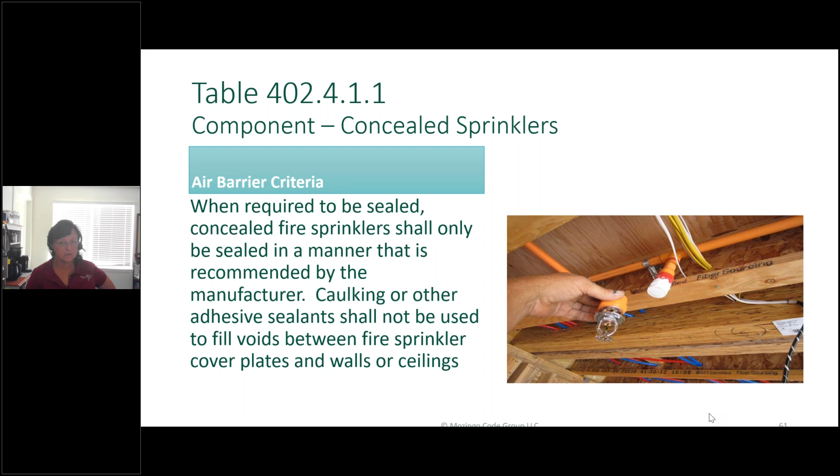And then I always say pay attention to all those other places. If you are required to put fire sprinklers, it's hard to get good air sealing on those sometimes, because it's not like you can just seal those plates. And so I pay attention really close to all the other details, because I'm going to have some leakage around this. But it's mostly do it according to manufacturer's install instructions. And then don't forget your ventilation. That's the biggest thing. You're building a tight house, make sure you ventilate it.

So here's the other things that we found in Nevada, on whole house mechanical ventilation. Only 50% of the houses had it, and on only half of those you had the right controls. So I know you have amended out blower doors, but just because you don't test doesn't mean you're not building tight. And so you have got to address mechanical ventilation.

You have to bring in fresh air to keep condensation down, to allow people to breathe, and to make sure that we are dealing with off-gassing of furniture and everything else. We need to have fresh air in these at a controlled rate. So working on that and getting the proper controls so that they're running intermittently or continuously or whatever you choose.

Duct leakage: we found the average duct leakage was at 3.46, so that's great. We did find a leaky one at 16 CFM, not so great. Low at 0. You believe it? I don't even know how you find a 0 leaky duct, but what we found a lot of the times is that the problem with the test results is you would have been a lot better, but it wasn't sealed at the air handler. The air handlers aren't being sealed correctly, so we're going to look at that in a second.

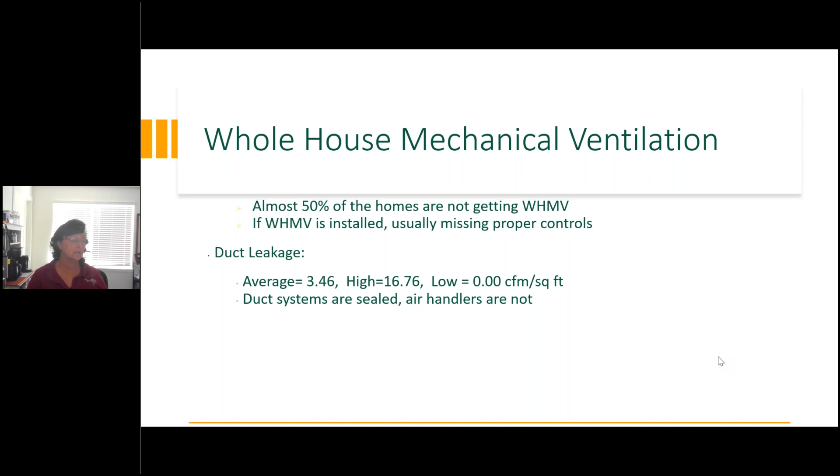Some other stuff that we found: in the South, almost exclusively 80% furnaces were being installed, which is okay because the majority of you are not heating anyway. You're cooling. We'd rather see more efficient cooling. But in the North, you had 92% or better because you are heating more, right? And so that's good. It was good to track that. That's something DOE doesn't require us to track that we did.

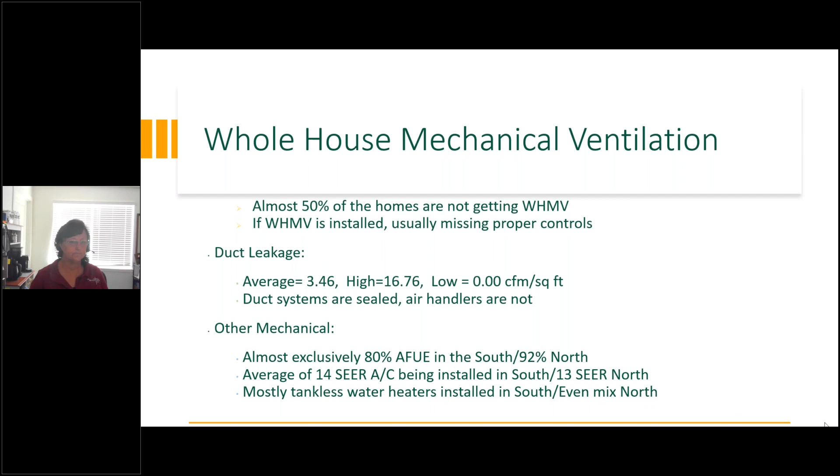In the South, you had 14 SEER air conditioners, in the North, 13 SEER, so that's great. Mostly tankless water heaters in the South, and a mix between tankless and tanked in the North. Just something we tracked, and it's good information to have. But there's some good information out there. If you Google nachi.org, air sealing of the cabinet, there's some great places to make sure that you catch on how to get better air sealing at that cabinet. That's where we found the biggest air leakage in these systems.

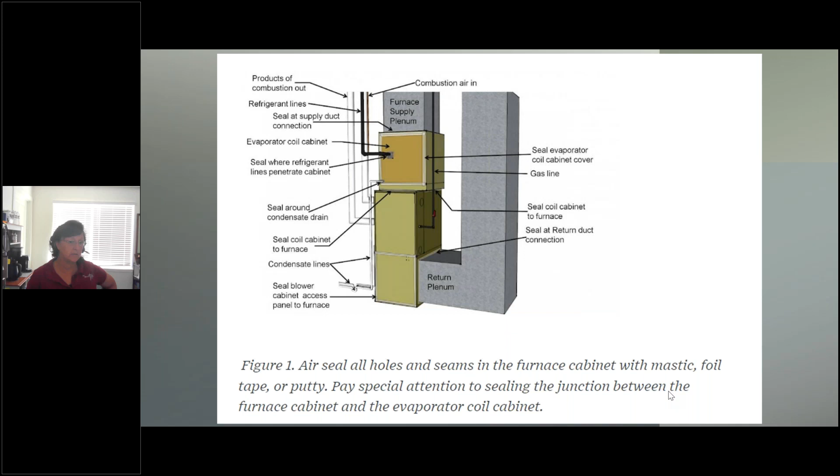The other thing we tracked was insulation. Insulation in ceilings, overall pretty good installation. The average was only R19. We did find some with no insulation, and the high was R49. So you know, if you guys move to the 2021, R49 is required even in climate zone 3, R60 in climate zone up in the north. So something to pay attention to.

What are we meeting? The average R19, that just means that remember 71 or more of those homes used a performance path. So that just means they traded off. It doesn't mean you're not meeting code. It's just probably it was traded off to a lower amount, meaning you did something better. But I found this a good thing that says, if we did the R49 that was required, then we could save $1 million a year in energy costs by just going to the R49. That was an interesting amount of money.

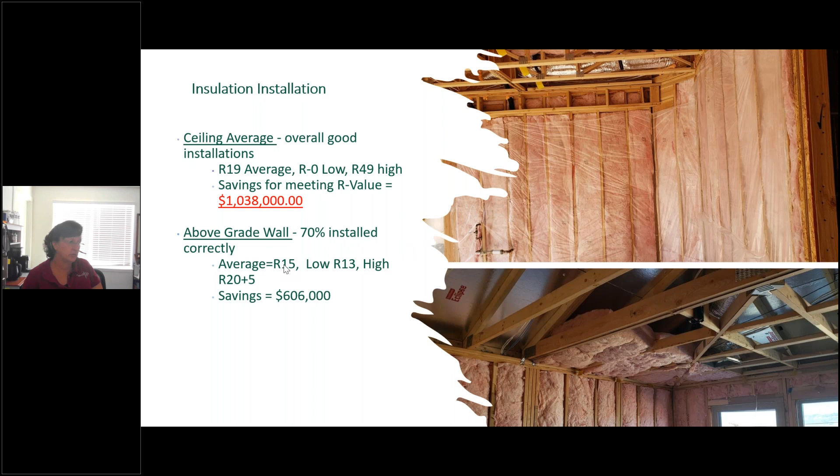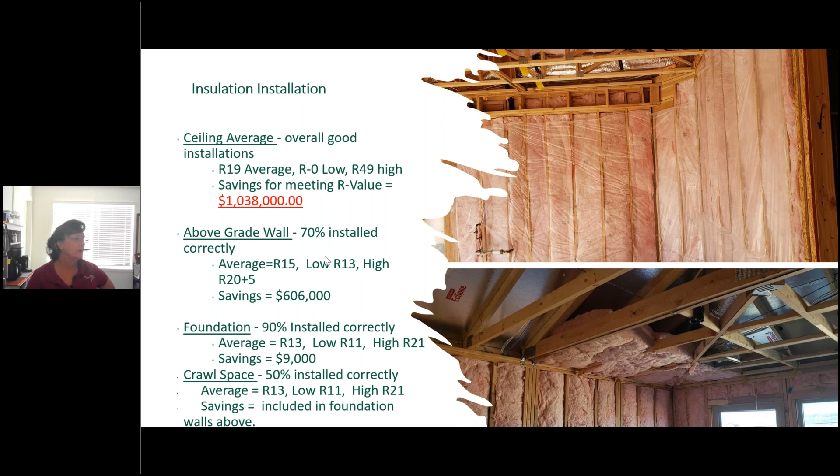Above grade walls installed correctly, pretty much. Average R15, just meaning it's traded off again. The low was R13, and you had some that came in at a 20+5. If we met just the basic code requirement prescriptively, we would save $600,000 in energy per year in Nevada. Foundations done pretty well. We didn't find a lot of problems on foundation insulation, and then you have crawl space insulation, only 50% done correctly, but overall still only 9,000 between both of them in savings. Not say only, that's still an amount of savings that we could see, but where we're going to put our focus, right?

And then windows, right? You're doing great on windows. The U-factor requirement is 0.32 in the south and 0.30 in the north. Here are averages that we saw. They were all better than code, or mostly better than code. Your low and your average were the same, so that's great. We saw a couple non-compliant, but you're doing great on windows.

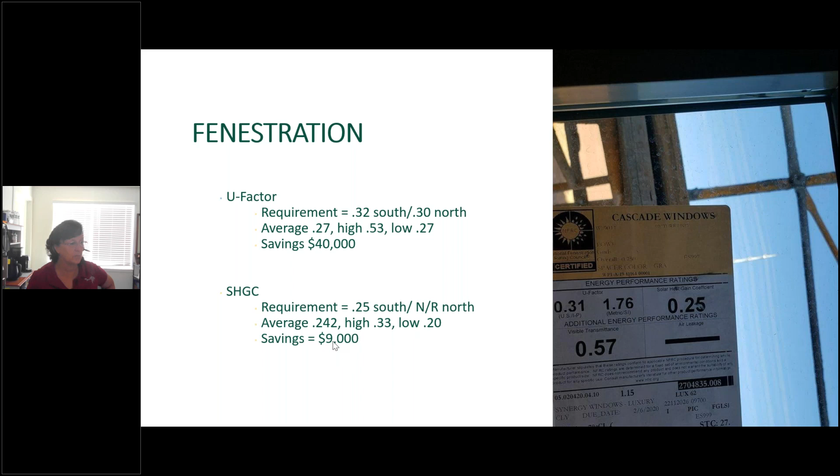It's your solar heat gain in the south that's big. The north is throwing you off because there was no requirement, and so it added to that average. But you're still doing pretty good in this. It's probably a higher savings if we just looked at the south by itself. This number would be more, but we're looking good, Nevada.

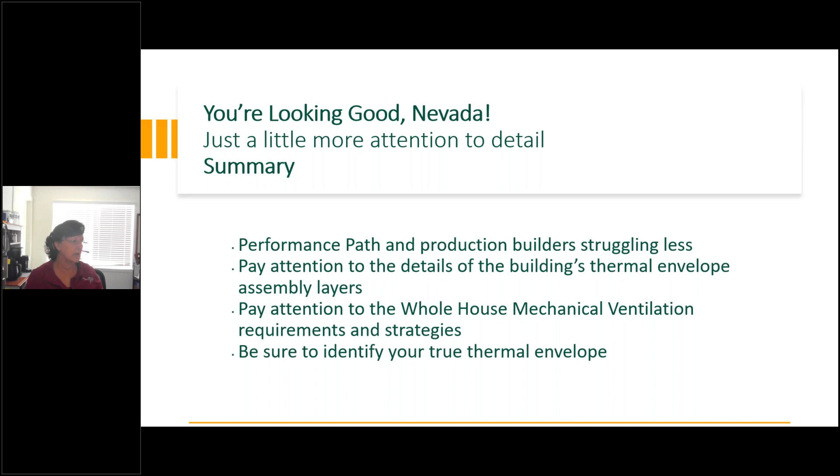It's attention to detail. People using the performance path and production builders are struggling less than prescriptive or custom builders. Pay attention to those details in the thermal envelope, all those assembly layers. Pay attention to your mechanical ventilation and the strategies. Identify the thermal envelope and seal that air handler. And that's what we found in Nevada. I'm a little bit over, so I'm going to go to questions.

Super. Thank you so much, Shaunna. We really appreciate it. A lot of info, sorry. No, that was great. Because we are so short on time, I have 2 questions that I'm going to ask you before we wrap it up. Okay.

The first one is from one of the audience members who asks, it is my understanding that the 2021 IECC requires duct testing in all compliance paths, regardless of duct location, except for the total building performance path. Is that correct? So duct testing has always been mandatory. You always have to test no matter which path. That's 100% true. It's always been that way. No matter which path, you have to test your ducts.

And then there was always an exception. You don't have to test as long as you are inside the thermal envelope. The only change in the 2021 is that now you have to test all ducts, whether they're inside or outside the envelope. So duct testing has been one of those mandatory items. It's not something you could trade off. You can trade off the amount of leakage.

So if you were required 4 CFM prescriptively, you can trade off to 3 CFM and use that as a deposit because you did better than code, or you could trade off worse and use that as a withdrawal because you did worse than code. You can trade off the amount, but you have to test.